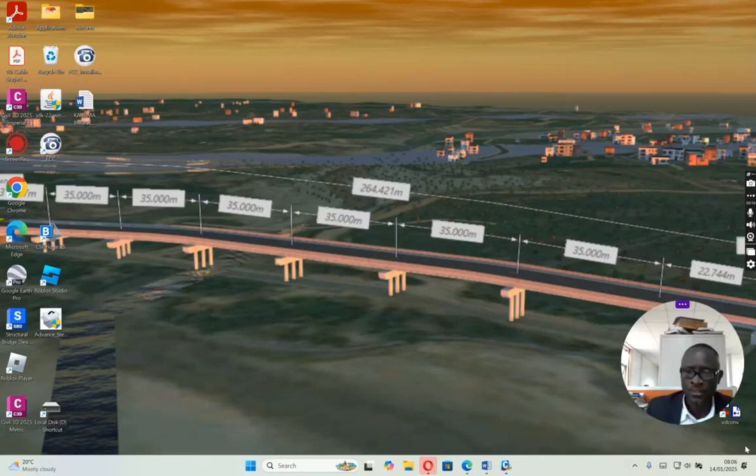Just to start our day, first an apology. I think a week ago I posted some knowledge sharing on post-tensioning box girder, but later on I saw comments that the sound wasn't there, so I removed it. Since then I've been trying to sort it out. Yesterday one of my young engineers helped and sorted out this thing. So I said let me replay this topic that I had shared with you and withdrawn. Let me share again because that is something that I thought I should share.

Okay, so this is, yes, design of prestressed concrete box girder using Midas Civil. Definitely we have talked a lot about Midas Civil. That's my choice. From 2018 when I learned Midas Civil, it has been a very good software. I feel comfortable using it, and I'm still learning more. I will get more time and also learn. It's a good software comparable to others. I know we have CSI, we have the LUSAS and the rest, but I found this a bit user-friendly.

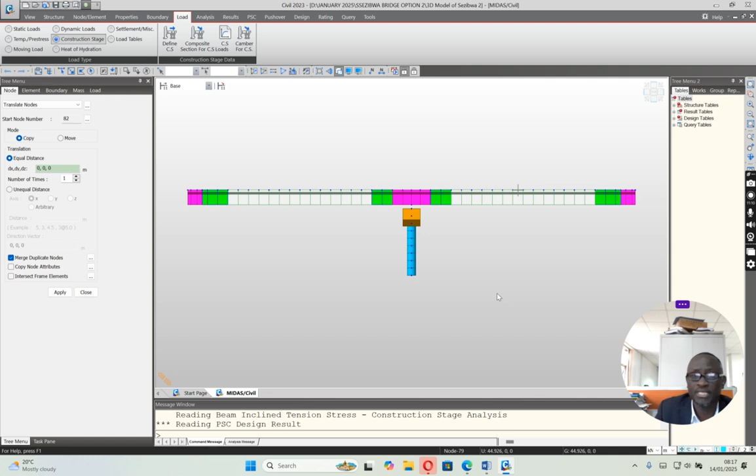So this is what you would call construction stage. For construction stage 1, this is your support system - you can see here representing the abutment, and this is the pier. Then construction stage 2, you see now what it is. Then the third stage - so all these stages must be modeled and catered for.

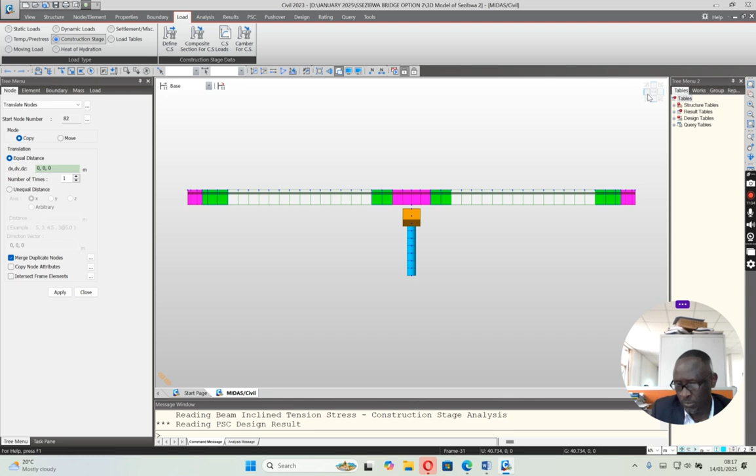Taken care of in your analysis and everything. So this is where I talk about construction staging.

So then we can go to analysis and design. This is where you do load applications, you do finite element analysis. Basically Midas uses that, where now for applying the application you do dead load, superimposed dead load - this is now both superimposed dead load and the dead load from self weight. Then live loads can include even traffic, pedestrian, quite a number.

Then pre-stressing forces, because for post-tensioning and pre-stressing systems, pre-stressing forces you must also apply when you do the cable. It has to be, because you have to pull it and then allow it to exert force onto the member to be in compression.

Then there are design checks you always have to do. Once you do your design, it's important to check compliance with codes and standards. The good thing with this software is that after doing the design, it will give you a comparison with the allowable limits. If it has exceeded, it will tell you this is beyond limit, so you have to adjust the design.

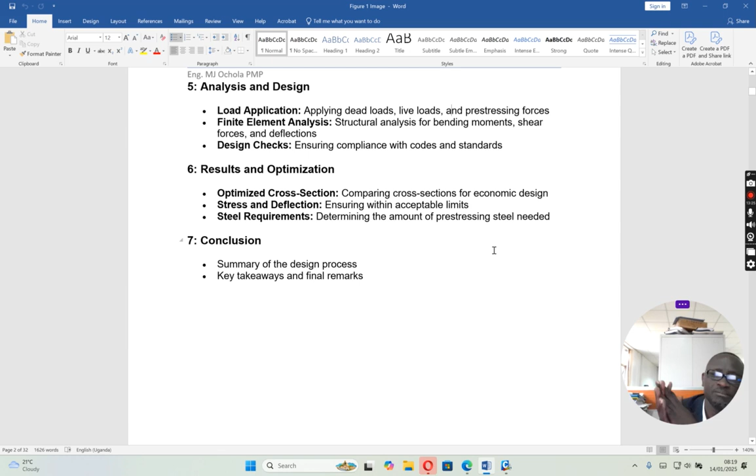Then results and optimization, comparing cross-sections for economic design. This is what we normally do within acceptable limits, determining the amount of pre-stressing steel needed. That's just a matter of now. Maybe you find you've done more than needed, about 80%, when even 75 or 60% could do the work. So you try to do an economy, resizing the members until you get what fits the purpose.

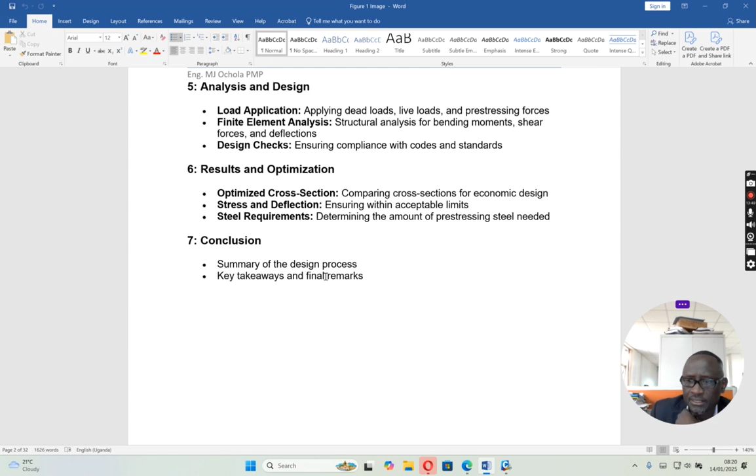But again, if you look at the redundancy I talked about, it might be tricky if a 250mm section can work, and I don't think it has any impact if I do a 275 or even a 300. The impact will be minimal, because the cover will be increased a bit, and the carbonation ingress can be delayed further, and the section becomes durable without impairing the integrity of the bridge.

So that is a brief narrative.

So the bigger question now is, what should a modeler be aware of? Say okay, I'm going to model this bridge, I want to use Midas, I want to model it. So what are the requirements? First, you need to know the structure you're going to model. You need to be well versed with the geometry. You need to know the different elements, dimensions, all that you need to know.

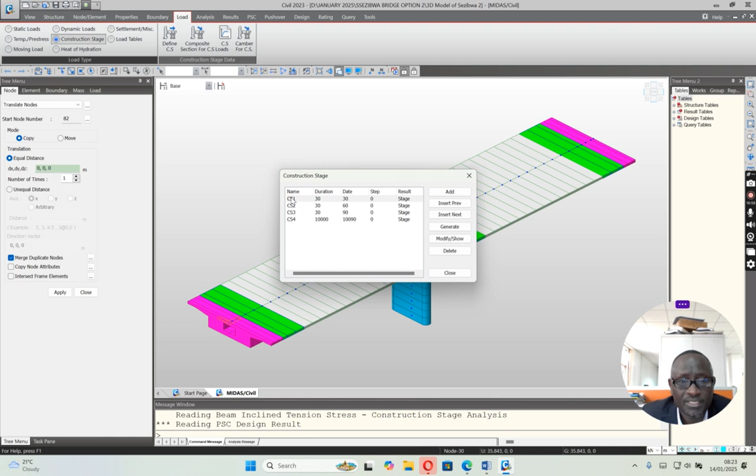You need to be aware of the structure and boundary groups, because these are the things that will help you group your structures to do the construction stage sequencing. Construction stage requirement is also important, so you always have to come here and have a look at what to do. You see the element, the boundary group, then the loading group. You need to be aware of all this, and they are all created here, and that will simulate exactly how you are going to construct this bridge.

Where do you start from? That's exactly where you do it, and you give it the adequate time, load it, put all these other requirements, put the boundary conditions, and proceed. So that is why it is very important.

The issue of transverse tendons - with this box girder, sometimes you realize that even after pre-stressing and tensioning in the length or direction of the bridge, transversely you may find that the overhang is too much, and when you check the local effect analysis and your design, you realize the cracks are still too much, sometimes even deflection. So sometimes you have to apply transverse tendons, and if you check most literature, they give some guidance on how to do that, but you can actually model it properly and check, ensuring there are no stresses induced beyond limit. That will be from first principle.

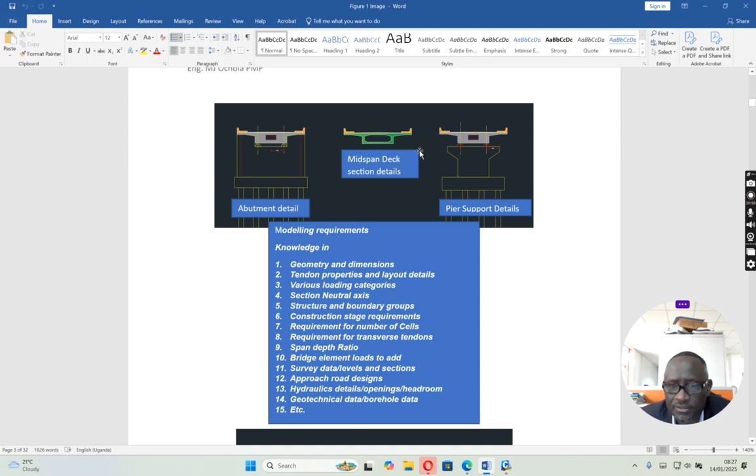Then the raised walkways, you need to determine the weight. Then the wearing surface, you need to know the weight. Then if there are services, all those different loading patterns need to be taken care of, and you group it under superimposed dead load. You could apply them differently, but when you get into grouping, you need to know where to place that.

The survey data, levels and sections - you need to know the levels, the terrain behavior, topography, so you're able to model your substructure system. The top of the deck should also depict exactly how the bridge sits, whether on grade or on slope, you have to design it that way. If it's curved and also on slope, you still have to model that. That knowledge is very important.

This now takes you to role play - who do you work with to make sure you have all the required information to help you do the modeling and the design?

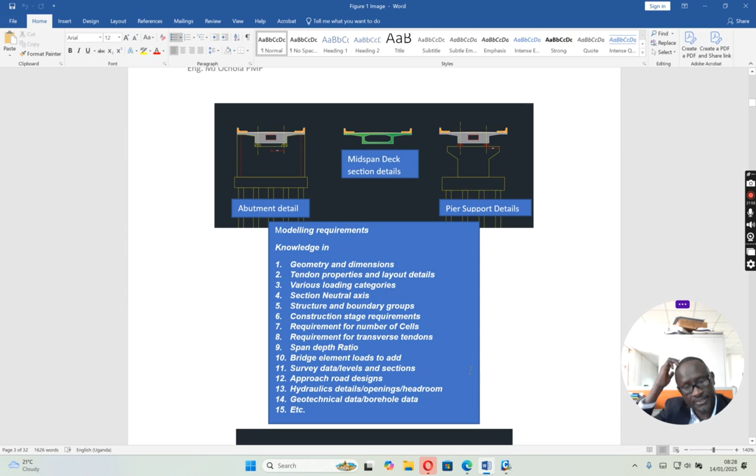Then the issue of approach road design - the highway person must come in. You get to know the profile, so you're also able to adequately model and design the fill, the retained fill behind the abutments.

The use of hydraulic details - the issue of openings, the headroom, the scour depth, all that information. You need to know all of this, which will guide your model.

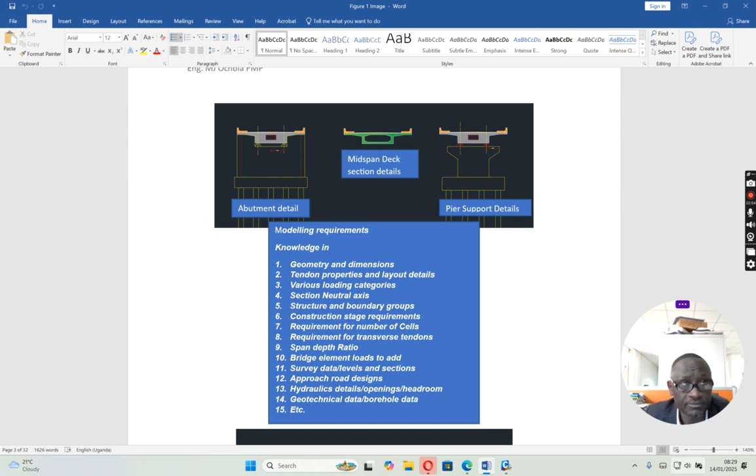The use of geotechnical data, the borehole data. If you're going to model soil structure interaction, these piles must be modeled. So what guides the modeling is actually the geotechnical data or borehole data - that is very, very important. Without that, you will just start guessing. So these are some of the things you need to be aware of.

Normally a good modeler is one who understands the geometry, who can easily draft. Drafting - sometimes we say it's for the technician, but even a designer, the engineer needs to know it, because that is where you understand the different elements of the structure, and when modeling you know how to stack them to get the real thing you want to model and analyze.

So you have a span of 30. Now I think this moved - this span has to be in line here. Even this has to move. This should be slightly here. If you adjust this, I see now why it moved a bit. So here, if you move like this, okay - adjusting this member affects this span dimension.

So basically this span is given. The hydrology guys always give you the internal dimension, but for you now, based on this center line, it's now up to the engineer.

Tendon layout profile is guided by knowledge of the slope at the anchor block, manuals and code requirements. You can now see these are the different profiles you need to be aware of. You even need to sketch and see the different curve areas, the minimum radius you're going to use. At this point, you need to know the slope at the anchor block - using rule of thumb, it is 6 to 12 degrees.

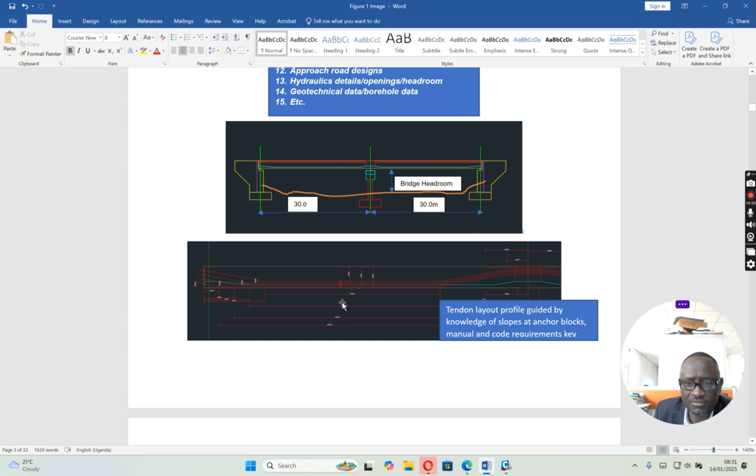So this is something that you need to be aware of. It helps a lot. So without having some knowledge, because now even the different types of layout, you have the parabolic, you have the drape type. This seems to be like a drape type, but in the model you see it's a bit curved. You combine the drape and so it's a hybrid type kind of modeling. Okay,

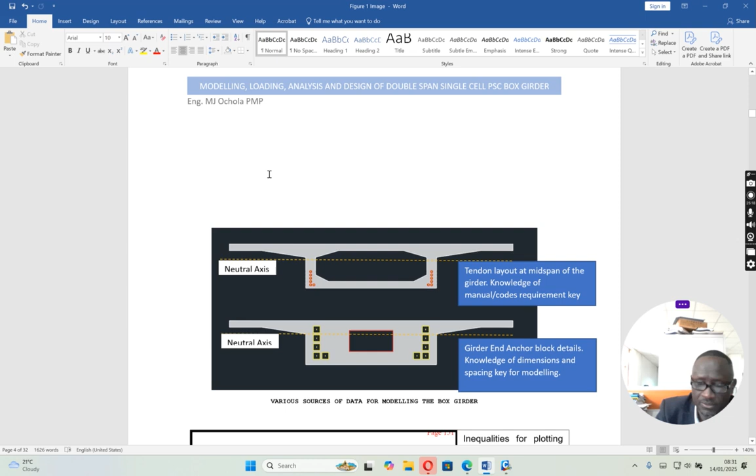so this is a typical section. You can see this is a mid span and this is over support. You can see the neutral axis, but this is the mid span. This is one way of defining your layout. Another one could be down here. So it depends. Next time I will share the one which does it down here, at the bottom flange. So this is running along the webs.

So you see these are depending on the number and the area of cables here. You can do quite a number if you want. Here is only one column: 1, 2, 3, 4, and this 5. You can actually do two columns per web if you want, depending on the loads and the span. Okay, so basically various sources of data for modeling the box girder.

This is the girder end anchor block detail. This is very important actually for post tensioning or pre-stressed concrete. If your anchorage or anchor block details are not well done, if there are defects, definitely that girder will not work very well, because all the tensioning and holding of the tension is done at the end section of the girders.

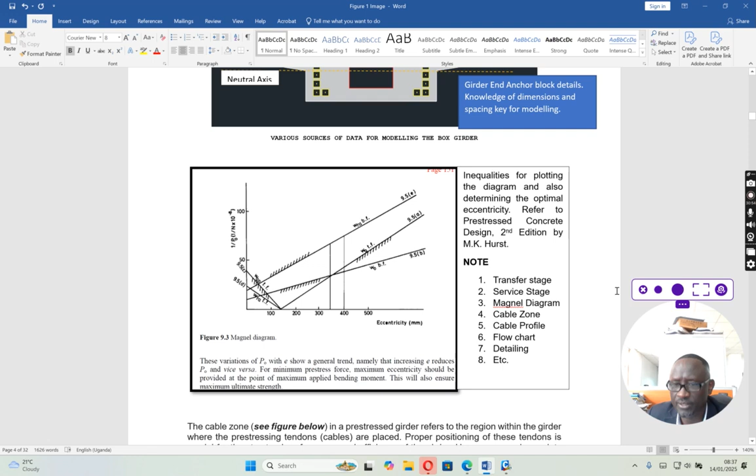The cable zone, cable profile, flow chart, and detailing. All these are very, very key for you to follow when you are dealing with pre-stressed concrete girder. And here it is, the cable zone. See figure below. In a pre-stressed girder, it refers to the region within the girder where the pre-stressing tendons are placed. Proper positioning of these tendons is crucial for the structural performance and efficiency of the girder. Here are some of the key points you need to look at.

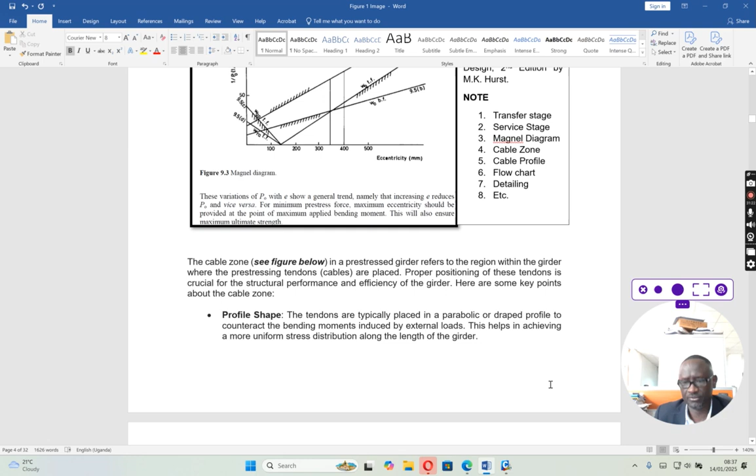So this is the cable zone that you need. So this is your neutral axis. So all these cables you find actually all lie below the neutral axis. Anything beyond will generate excessive stress to the members. You have the bottom and then you have the top. Here you can now play with your cable profiles to ensure that when you tension and you are checking the stresses, you don't have stress limits exceeded. It will create a lot of cracks, and cracks are not required in pre-stressed concrete. So that is something that I thought I should pick out.

And then this is now the cable profile. Cable profile is important. I've seen even on site. The engineer must be able to provide the coordinates for plotting the cables to simulate what was designed. Otherwise, if there's no compliance with design, then it will not perform the way it was designed. The eccentricity will be different, the stress generation will be different, and you'll be lucky if the stresses generated are within limits. If not, then the project fails.

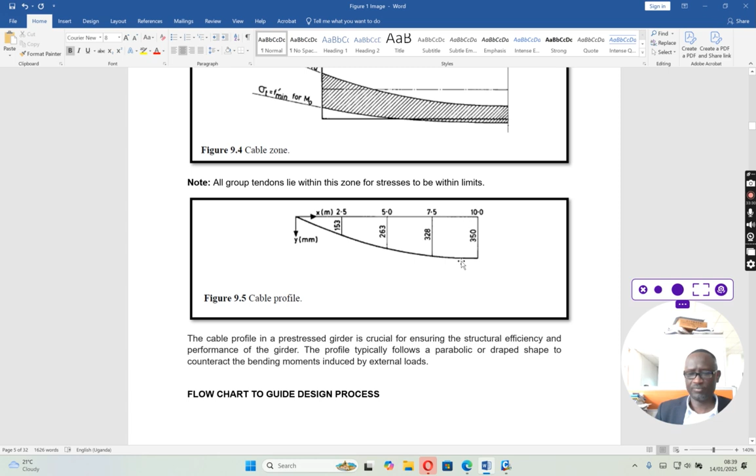So these coordinates are very important, that they are plotted verbatim, so that what was designed or modeled is exactly implemented. The cable profile in a pre-stressed girder is crucial for ensuring the structural efficiency and performance of the girder. The profile typically follows a parabolic or draped shape to counteract the bending moments induced by external loads. So if you don't do the coordinates well, what do you expect? It will not work. You'll get into trouble.

Then I think there's a flowchart. Yeah, this flowchart is normally for all the design we do. Actually, we are supposed to generate flowcharts. Then using the flowcharts, you are able to look at it. You give it to the junior engineer, someone fresh from campus. They can actually follow it. If there are issues, they can get back to you, and then you guide. I've seen in most literature, almost all actually, you find at least there's a flowchart that they use to guide.

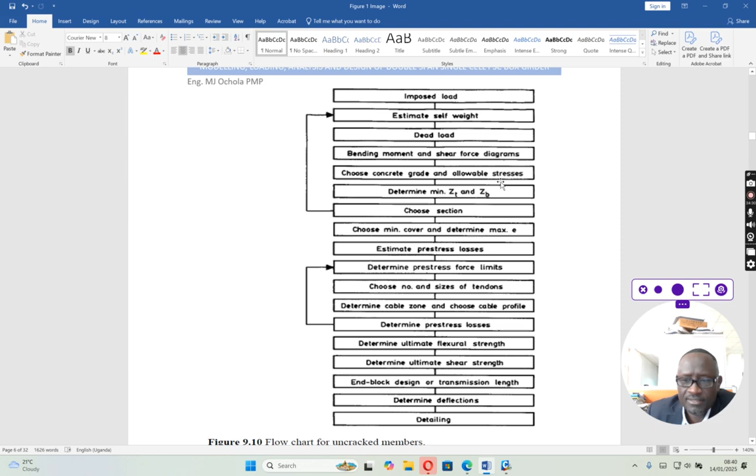You can see here they talk about imposed loads, estimate the self-weight, dead loads are here, bending moment and shear force diagram, choose concrete grade and allowable stresses. All these are guided. You get them from the manuals, and then you do your iterative design and make sure all the limits are complied with. Okay, this is for uncracked members, so you can also have for cracked members. So this I've already talked about.

Magnel diagram is a graphical tool used in the design of pre-stressed concrete beams. It helps determine the optimal pre-stressing force P and eccentricity e that ensure the internal stresses within the beam remain within permissible limits at both the transfer and service stages. Transfer, this is the construction stage, and then service is when you are done with construction and the bridge is open to traffic. So these are the geometric requirements needed to be known. Internal forces, that is estimate the internal forces, induced self-weight and moments due to dead load and live load, permissible stresses. This is something we've already discussed.

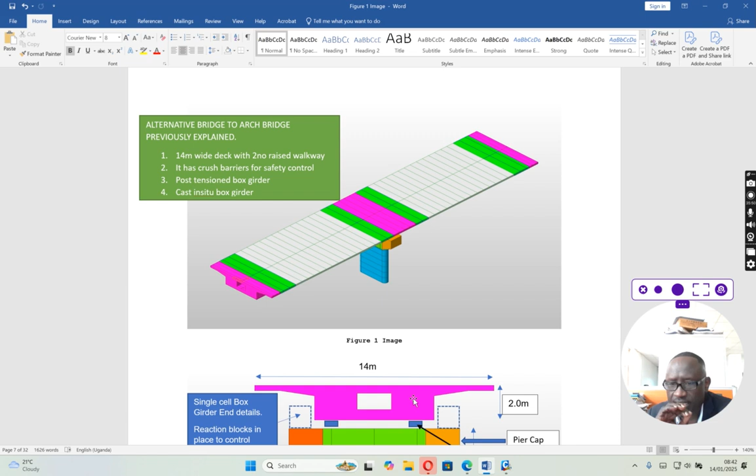Now this is the model. Of course, this box girder, if you look at it, I shared a similar bridge, but that was an arch bridge, which was also 30 meters. So what I did here, just replace the arch with the box girder. So now the next thing would be comparing materials, comparing technology, comparing the time required to construct, so that you can now say, okay, this is cheaper, or this one is expensive, in terms of material quantities, in terms of time to implement, and even the technology required.

So basically it's very important for you to say this is more expensive than the other only when you have done some comparative analysis. So this is a 14-meter wide deck with 2 raised walkways. It has crash barriers for safety control, post-tension box girder, cast in situ box girder. So even the construction approach is similar to that of an arch spandrel bridge, an arch open spandrel bridge.

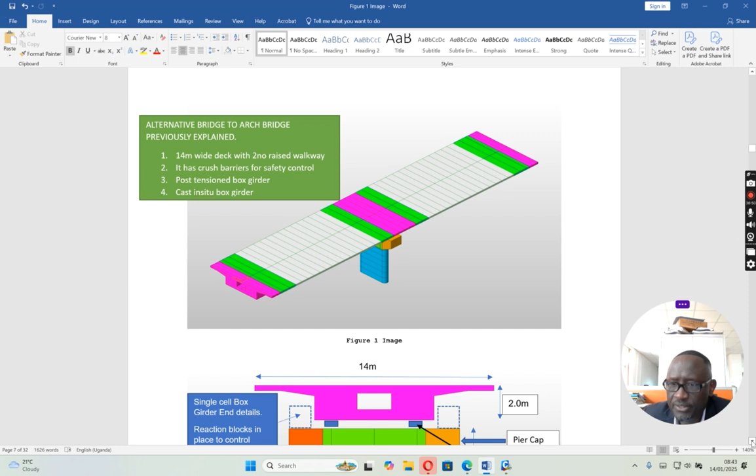So this is the detail of a pier support. These are the reaction blocks to control lateral movement in the event of earthquake tremors, or even when you have floods exceeding the headroom designed by the hydrologist. So the structure should be stable laterally. That is where the use of reaction blocks comes in handy here.

These are the details. This is a pier cap. Then this is the bridge bearing. We normally don't provide the design, but you have to design for it. Normally the manufacturer gives this design. All you need to get is the reactions, deformation, movement. Those are some of the information you need to share with the manufacturer. Then they will give you the bearings that are suitable for this bridge type, the bridge span and the weight. This is pier support.

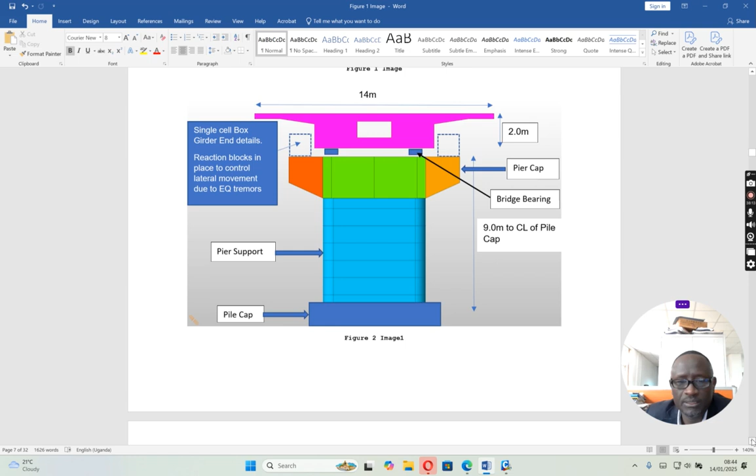Construction stage 1 is when you build the substructure system. Actually, I told you you can do the pile system first up to pile cap. That will be your stage 1. Then stage 2 becomes the substructure system, which is now the abutment stem and the pier stem. But for modeling and just to demonstrate, we normally combine both the pile system and the abutment or the pier support as one.

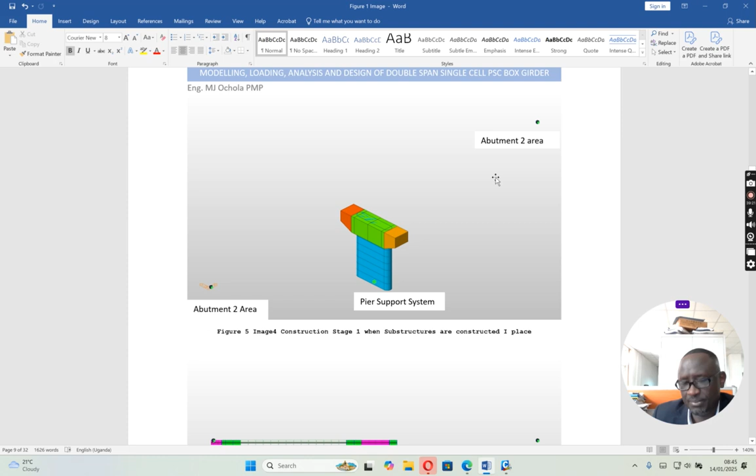So if you want to understand the stress generation right up from pile cap, you can actually do the different construction staging, so that you see the load build up in different sequencing. So pier support is here. Your pier, then abutments are represented with this.

Then under construction stage 2, you have now prepared your prop system. You stabilize the foundation here to avoid deformation during construction, because wet concrete is very heavy, including construction loads, equipment and human beings, so you have to be careful. So this is the first stage you do.

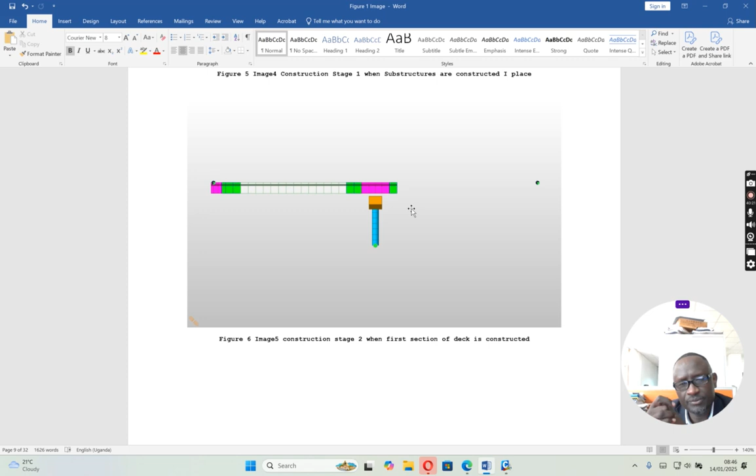Normally for a continuous member, you don't stop midway. It has to pass the support up to the point of contraflexure, where you have zero moment due to dead load. That is a good area where you can terminate, or else you have a construction joint. You do it after that point, then the next stage you start from that point and complete the span. So this is stage 1.

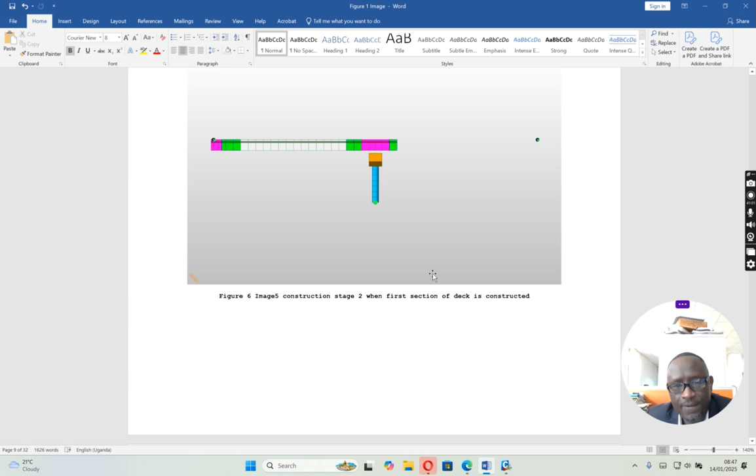Then stage 2, now you have put all the prop system in place. You have stabilized the bottom of the props to avoid any differential settlement. For pile systems, I think the settlement is limited to about 10 to 12. You need to check Tomlinson and other foundation design and construction textbooks, which should give you the limit requirements. So that is construction stage 2.

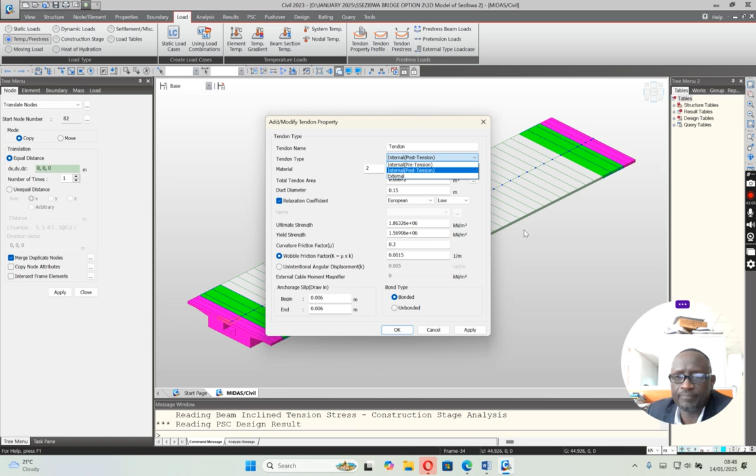There are different types here: internal pretension, internal post-tension, and then external. Very interesting terminologies here. This one here. Then we also have

tendon profile. This is now very interesting. This is where you have to plot. You see this one here. When you click on it, it's already appearing there. That's the next one. That is another one. So how do they do it? You come in here.

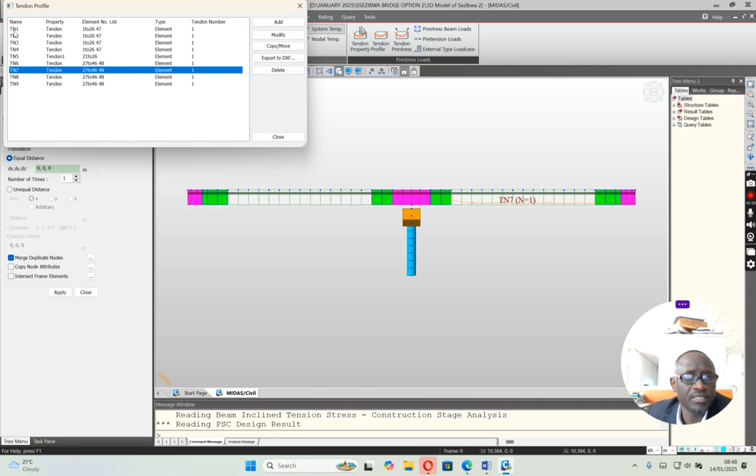Then you just look at the different ones. You see here you have the tendon name, you have the tendon property, you have the tendon group. You need to really know which group this one lies in. Then you come down here. This is where you have the coordinates; they are very important. I told you, without knowing the coordinates and understanding the geometry of the structure, it becomes difficult to model. So it's very important you get to know some of these things.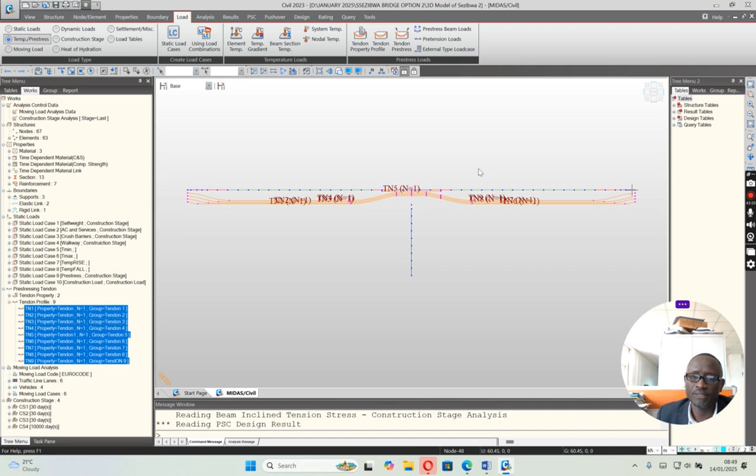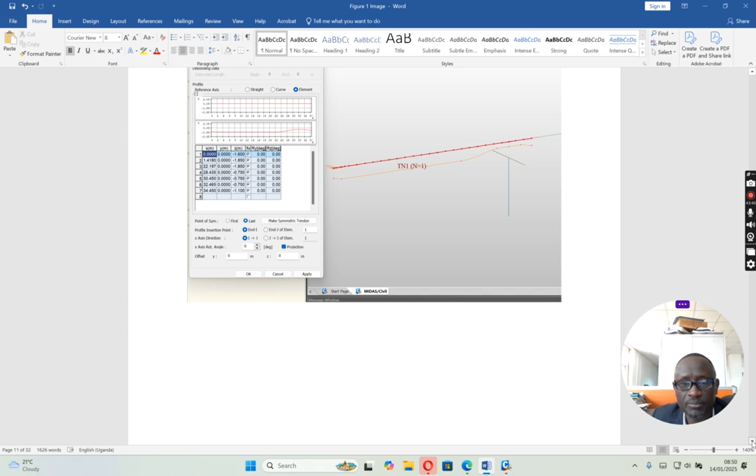There we go. So if you want to view actually all that you have plotted, you just come in here and then you display. That's what you can view. All these have been plotted. So that is how you can actually do your stuff. Okay, so this is a demonstration of how you can put the property. I've already demonstrated how you do the plotting, so it should not be a problem. So all these are the modeling process or procedure.

Now when you have done plotting, you also need to do the pre-stress forcing. You have to define the force, that is the tendon pre-stress. So we have to come under this command detail. This is the last part here. This is for self weight, but these are already given here. If they were not here, you would go to pre-stress and put the pre-stress system here. If I click one of them, then under the load group name, you already defined your pre-stress load group. You put it here, and then they all come. Under this tendon, you highlight all these, then transfer here.

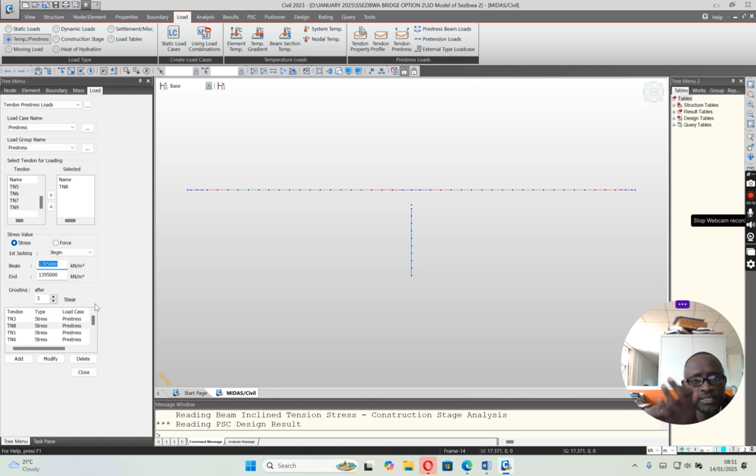Then they appear. Make sure you specify the stress values given. This is 0.75 times, not the jacking force, the ultimate tensile strength, 1860. Sometimes it is 1860, sometimes it is less, 1770, depending on the cable details and the loading. This 1860 seems to be for long span bridges and bridges subjected to high, extreme loading. But if it is for buildings, I think you can use the lower value. So basically that is what you have here, and then you transfer your load and you're able to see everything.

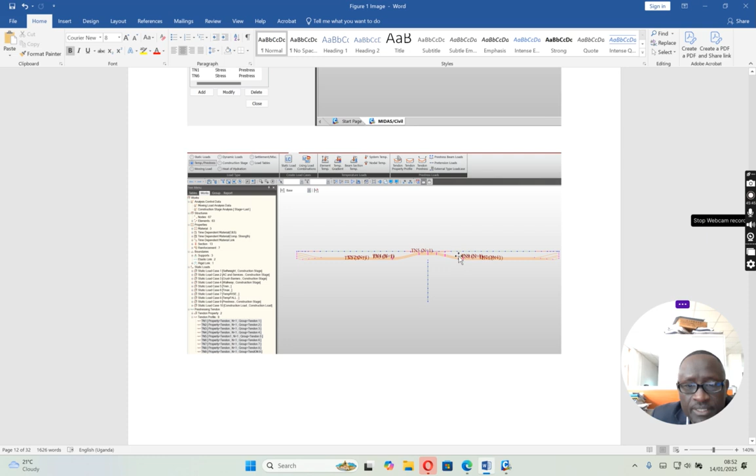Then you can come down here. I've already demonstrated that if you want to view all that you plotted, you can highlight it from here and then display. If you want to hide it, you click and do undisplay. So that is briefly it. These are the different loads. This is, I think, wearing surface and services. Being a line, it's designed as a line load, so you just take the width times the load per square meter. You should be able to get that as a linear meter load. So that is for the wearing surface.

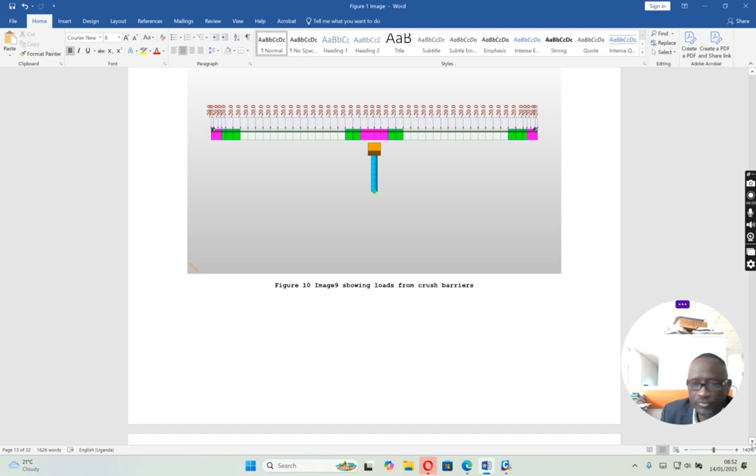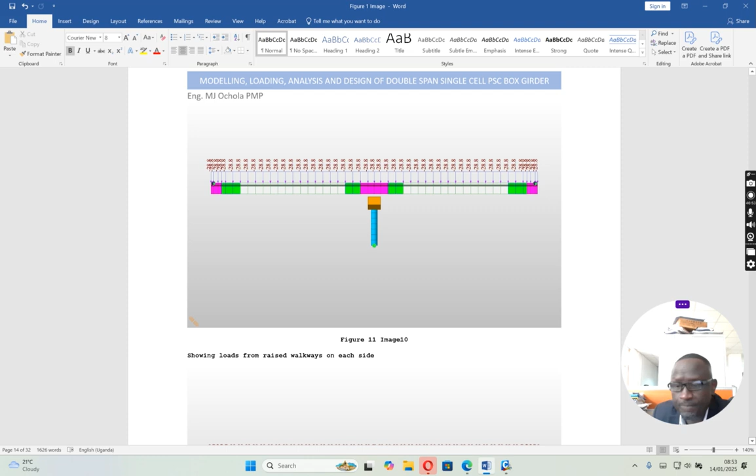This is for crash barrier. There are two crash barriers on both sides. Each could be about 10, so having two and applying it on a line beam should be 20. And then I think this is raised walkways, about 0.3 meter thickness and 24, that is unit weight. That's about 7.2. Multiplied by 4, you get 28.8, to apply it on a line beam. So that is how this loading works.

Then the temperature you can do. There are code requirements for the temperature you can apply, especially for the temperature gradient. But for the element, you just highlight. I think this box is affected by temperature, so that is exactly what you can apply. This is now the temperature gradient, but here I can still also demonstrate something.

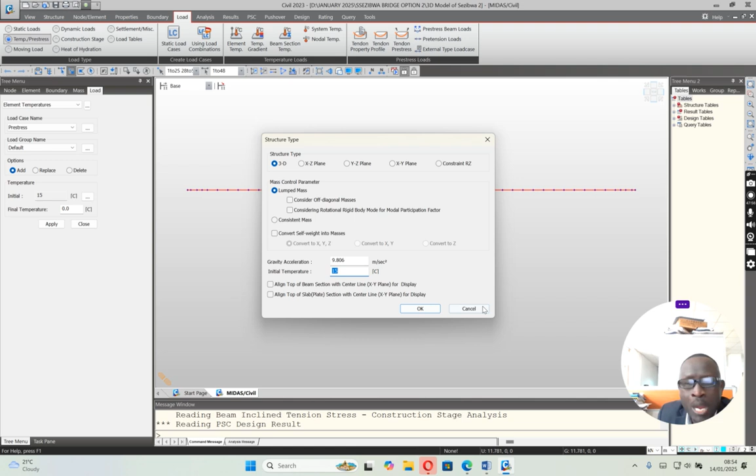When you come to the different temperature now, this is temperature element. You can go to initial, this is where you specify your initial temperature. Then you're able to apply maximum, but you need to highlight it first. Then if I want maximum temperature, just highlight here. Then you put minimum, which takes you up. This one brings you here, and then you specify. Then temperature gradient.

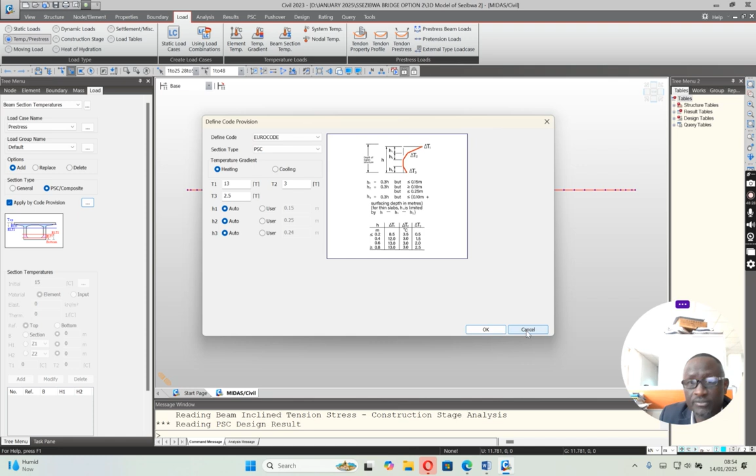This is where now you have to go. You go to the Eurocode system down here. Eurocode is here, PSC system. You have the temperature heating and the temperature cooling. So if you've done the issue to do with the temperature effect on bridges, you should be able to get all this literature, right. They are there in your notes. So you read. So these are just normal stuff.

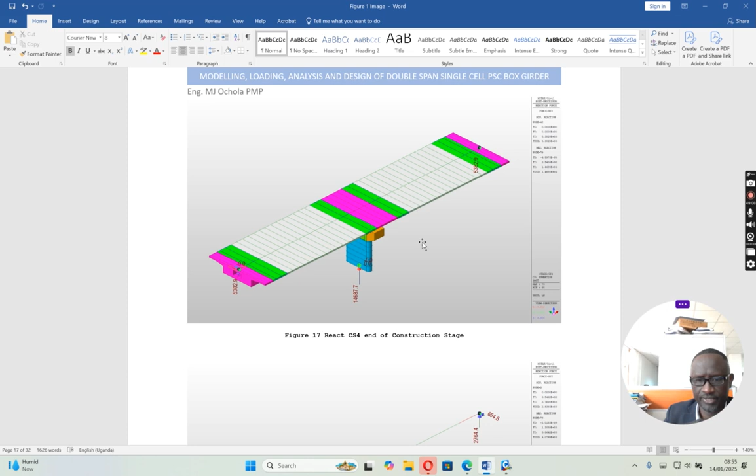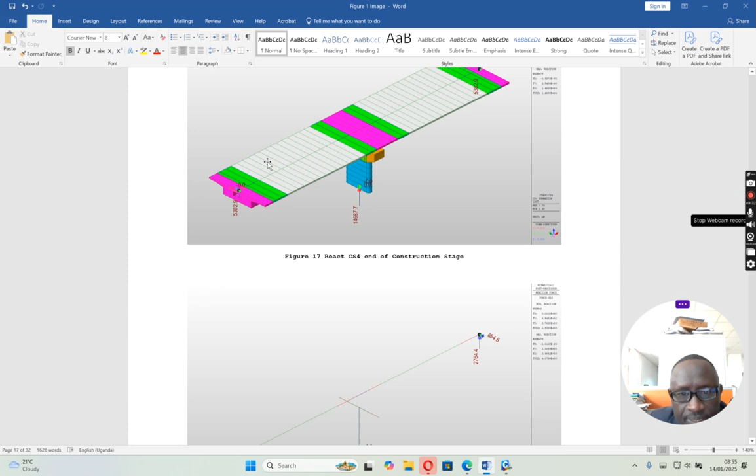Then this is traffic load. The reaction seems to be like so. You can see that the dead load, the dead weight, is higher than the live load at the pier support. You see here is 14,000 dead load, and then we have live load at about 15 and 5, about 30%. So these are the different reaction values you can experience. This is for load combination. You can see load combination now is high. It's up to 37,000, almost twice the dead load.

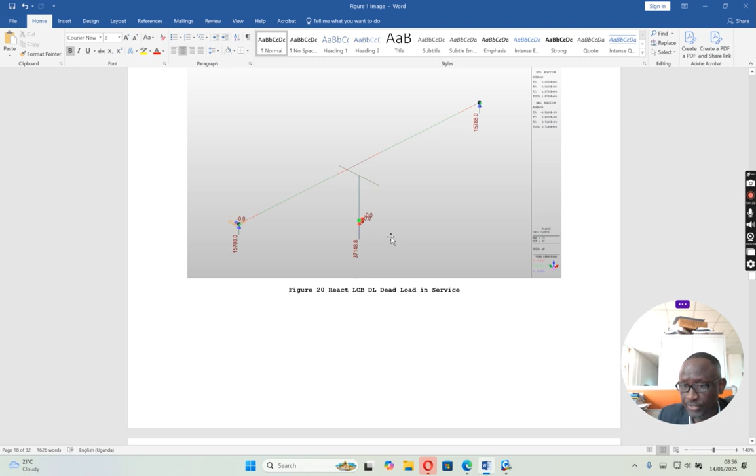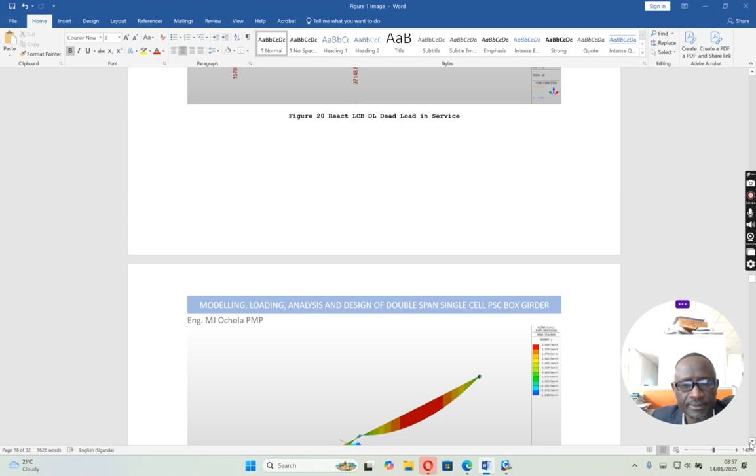Okay, so let me see. This is another load. Now this is the reaction dead load in service. The first one is when you have just completed construction, it means it is the dead load due to self weight, while this one is dead load combining superimposed dead load and the dead load due to self weight. Those are the two differences. You have to mark that. And these seem to be self weight. You can see the difference in the response.

This is pre-stress moment. It's the reverse of the number. So that is what you need to do. You need to read. This is the axial load. You can see the axial load on the deck tends to be higher here because both sides are stressing and affecting the section over the pier support.

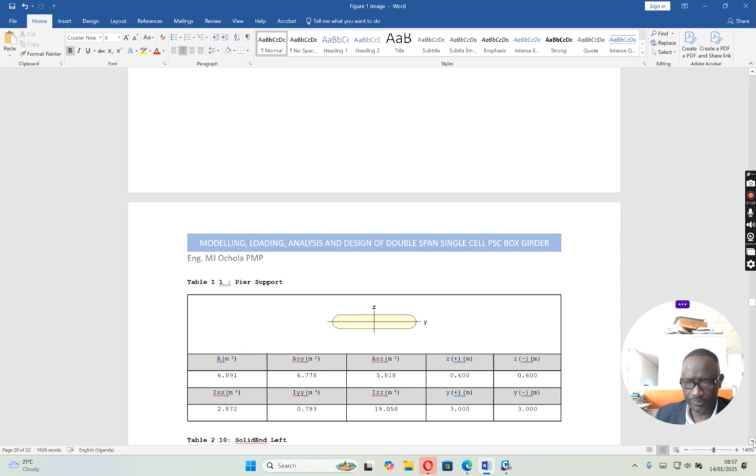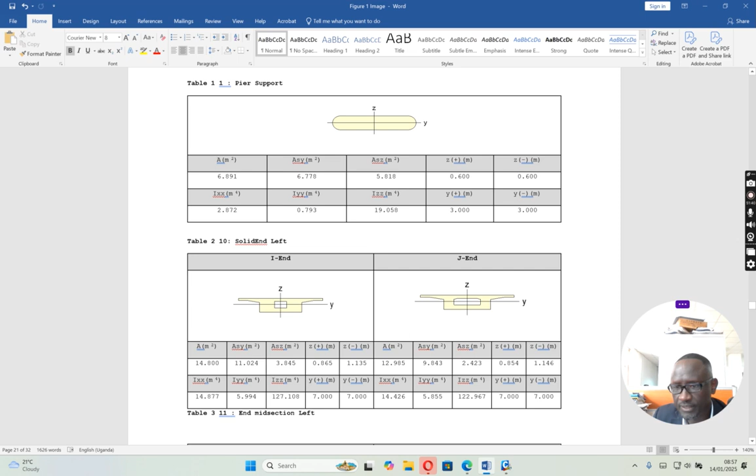These are the different sections that you can generate from the software. This is the pier section, to give you all the properties. This is our support, this is halfway towards the mid span, and this is the mid span. So these are the section properties that you can easily generate using Midas. Don't need to waste much time. If you want, you can do it. It's already from the modeling, you can actually get it. If you model very well, that's what appears.

Now there's this anchor block thing. I told you, you are going to pull your tendons, and then you hold it tight. It tends to shrink or to regain the original status. In so doing, it is compressing, because the end block is holding it properly. It tends to put this member into compression. That's why most of these pre-stress systems keep the concrete section purely in compression.

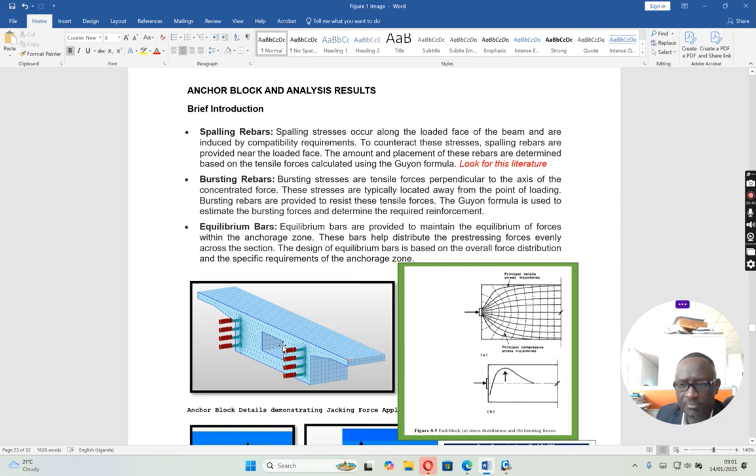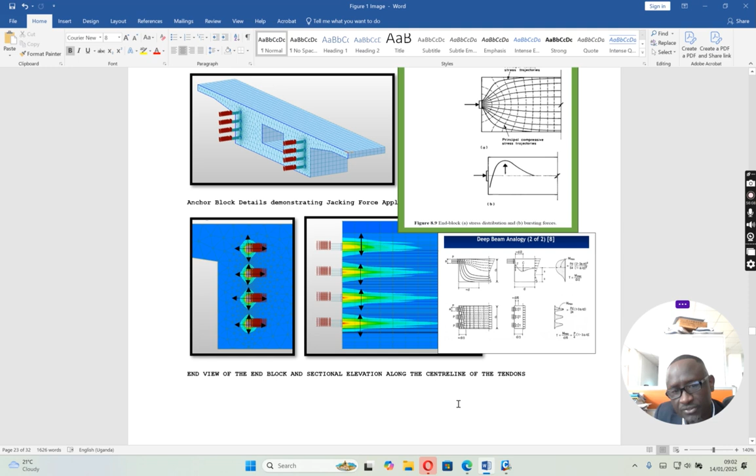Below is a model which was done. You can see this is the face from the extreme end, looking inside into the bridge direction. You can see the stresses are going both laterally and up. This is a section cut here, and then you're viewing it. You can see the stresses reduce away along the length of the bridge.

This is the deep beam analogy. So these are three, here we have four, here you can see three. This is the moment they are talking about, and this is the stress generated.

So you can actually model using solid elements, not plates, using solid, and then you're able to see the stress generated. You can also use these solid stresses to calculate the amount of reinforcement you need.

But it's good to relate to earlier work done by different professors. You are going to see different formulas used by different authors, which people are using in the field. When you come across one or two, you can also try to use and compare.

So this is just a model using Midas, but this is from already established literature by different scholars. This one is from M.K. Hurst, I've already given you this one. This is from Guyon, there's a literature - I think there was a presentation, a workshop he attended and made a presentation on. I think there's a big book which I picked this from. If I get it, I can share that.

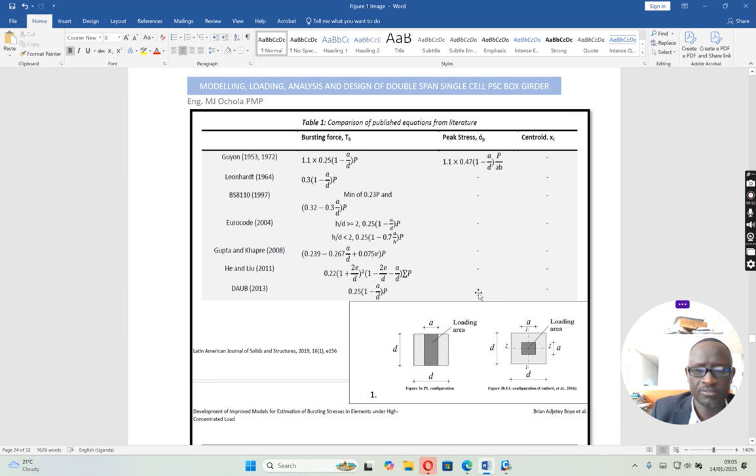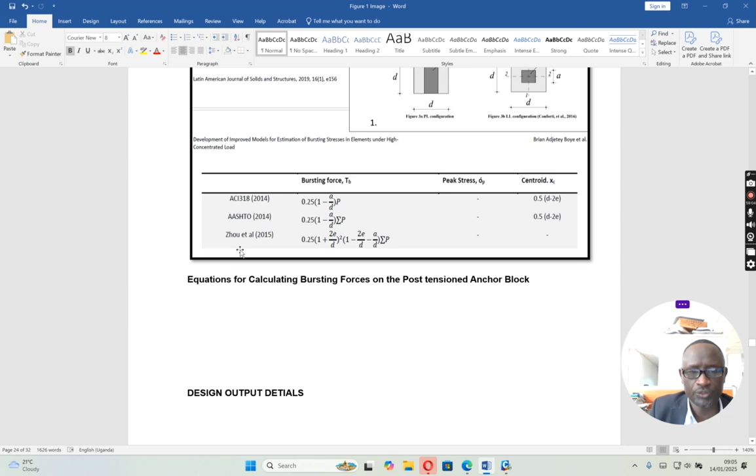But there are other existing texts that you can also read from. The BS 8110 1997 has something here. Eurocode 2004 has it here. There are similarities actually - Gupta and Khapre, He and Liu all have it. Then even ACI 2014, AASHTO 2014, Zhou et al, all these are here.

Now, having done all this design, you can also have design output. How do you appreciate design output from Midas? Not to waste much of your time and confuse you.

When you have done all this modeling here - boundary, load, analysis, results - now you come to PSC. Under PSC, you have parameters. Look at these parameters and fill them correctly. After you have done your analysis, you have the results, and from the results you are able to see the different load combinations, already here.

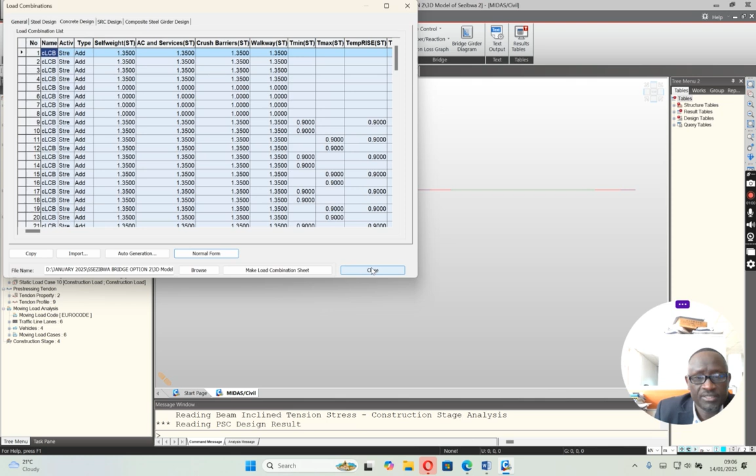You can even look at your spreadsheet stuff form. You can make load combination sheets, everything. But now you want to design to see whether the sections are okay or not okay. That's where we go, you come in here, PSC.

If you are dealing with reinforced concrete, you come to design and reinforced concrete. If you are dealing with steel composite, you come to steel composite. But for us, we are dealing with PSC, pre-stress concrete.

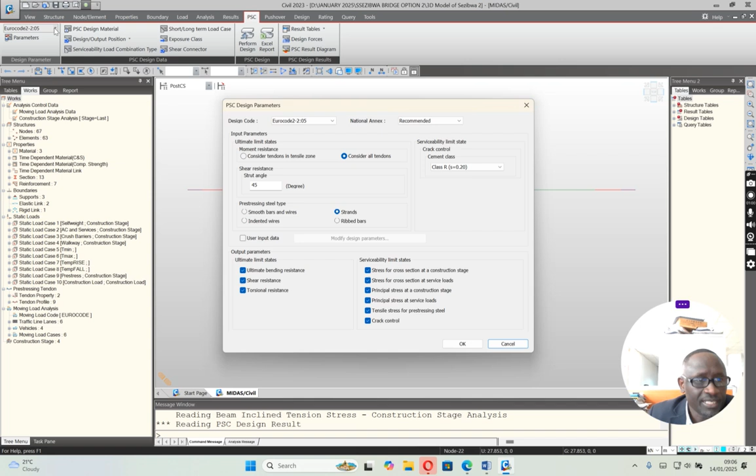So the parameter is very important, and the design code - are you designing using a certain parameter? Just make sure it is either BS, Eurocode, IRC, and the rest of it. So do that, then you come to design material. Make sure these materials comply - grade is defined, rebar type defined.

All that, then you come to serviceability. Normally, if you put load combinations manually, then you would come and put this thing manually. But if not, you come and there's quasi, there is frequent, there is characteristics here, because we did automatic load generation, load combination generation - that's how it also picks it and brings it to.

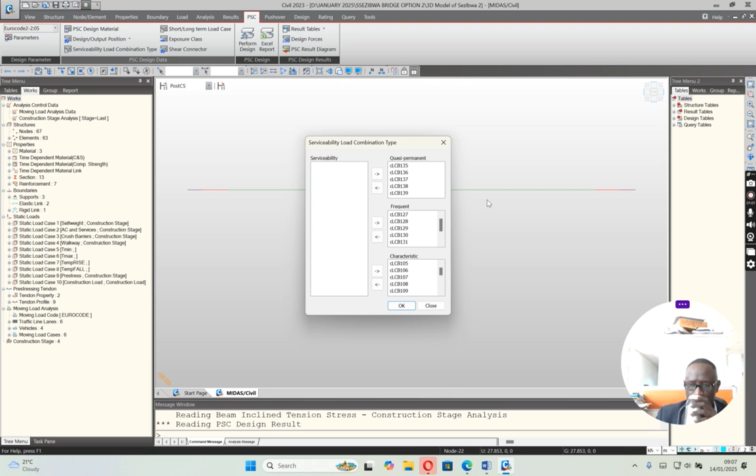Then we do this one by software exposure class. In the exposure class, this is where the knowledge of your geotechnical or material testing is very important, because you want to know whether water is contaminated, the chemical content is high, acidity is high, whereby you need to improve on the cover. Is it severe, very severe, or what? You need to understand that. Your code has all these conditions defined, like XC1, X0. You go to that literature to understand which one applies, so you're able to specify, maybe it is XD1 for the top or bottom.

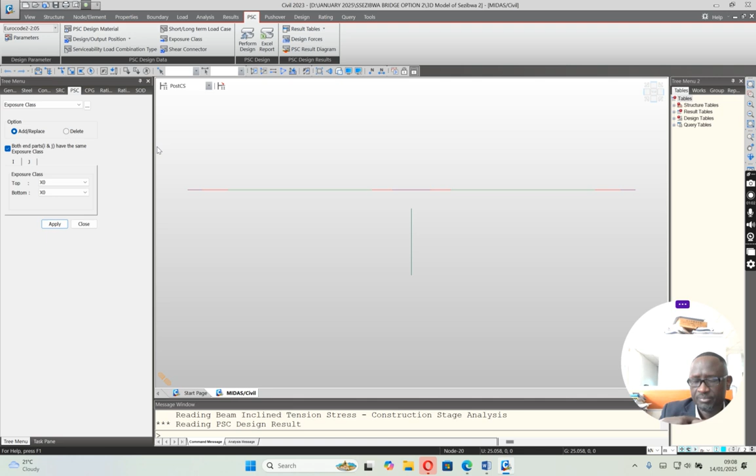Then from the exposure class, you do shear connector. If it is cast in situ, you don't need to talk about shear connector. But if it is precast, precast panels, each of the panels have the shear connectors. The way they do the concrete joints, so for them to joint, to connect well, and when joining the two and putting the bonding stuff, it works well. So you are able to specify here.

Then you come here. This is now after you have done all these requirements, you perform the PSC design. After you have performed it, you can view the different design checks. Check for flexure, this is check for flexure strength, check for shear strength, check for combined stress for cross-sectional construction stage. Then it also checks whether the stresses of tendons have not been exceeded.

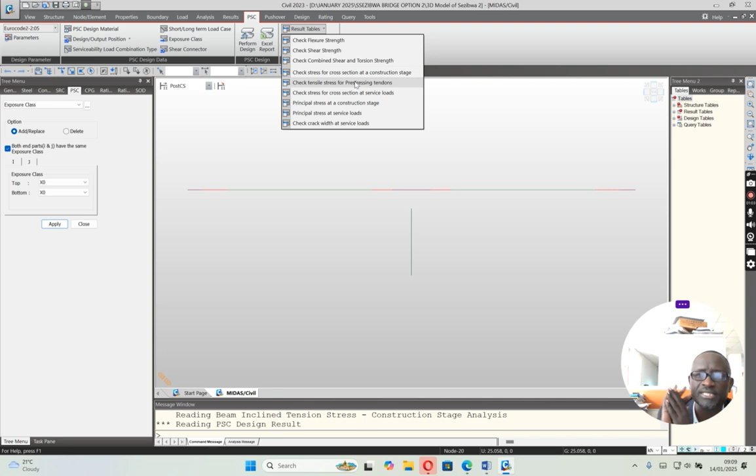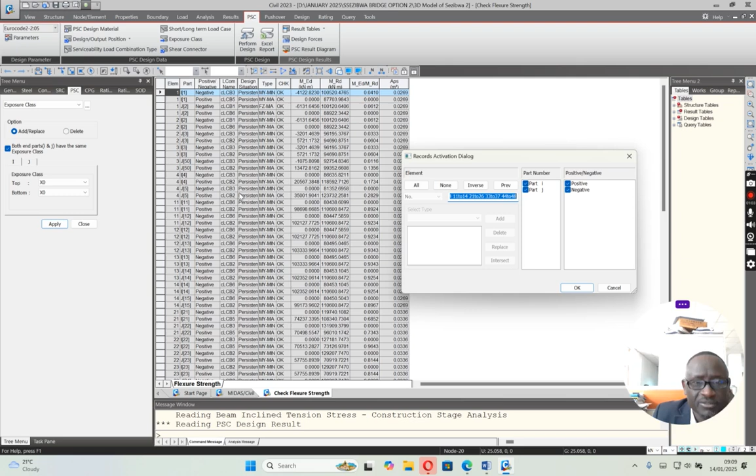I told you, you have to do this at construction stage, which is transfer stage and service stage, all the way down. So I can click here and you can see all these are passing. Your ultimate checks, both positive and negative, for all these load combinations have been checked and they're all fine, meaning the reinforcement you put in your section is okay. For shear also you can check. Shear has some failure in some areas, so that will help you improve on your shear rebars or section. You refine your section, revise it. That is something you need to do all through.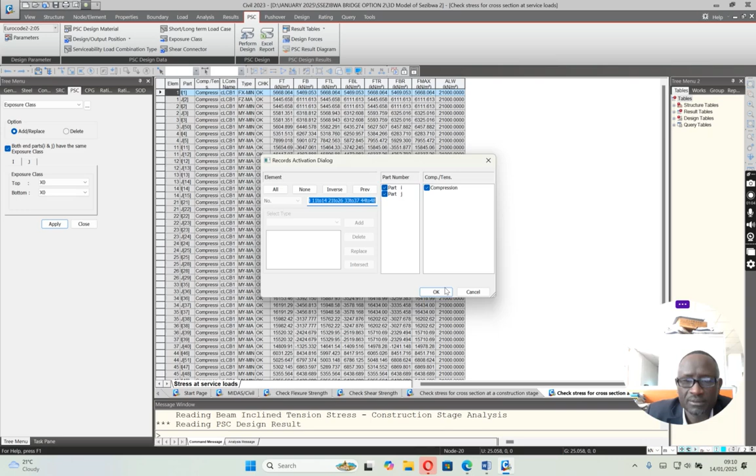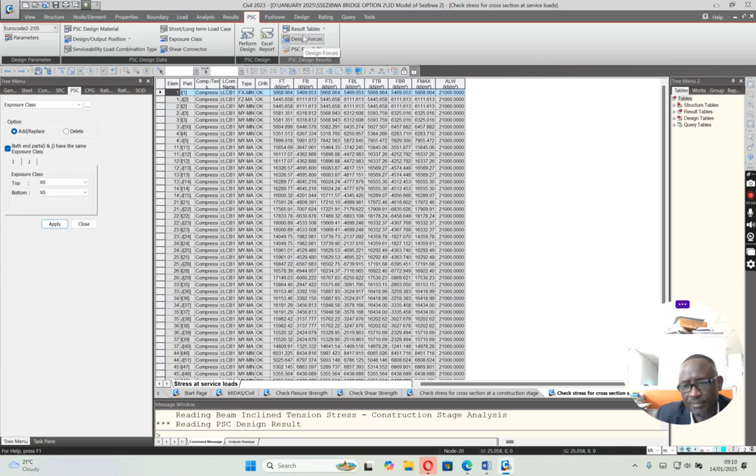If I look at the pre-stressing at construction stage, most of it passes except in a few areas, so that also requires you to modify. What about in service? In service it seems to be passing. That would mean you need to determine what is causing this failure at construction stage. You need to look at the amount of strand or the stresses defined at the beginning, the concrete section, or the construction loading could be more. You have to check all that.

From there you can also look at the different design forces. Last time I told you the moment generated when a section is pre-stressed is different from the moment generated when the section is reinforced concrete. You will find it is basically different, about 30 to 40%. So these are some of the things to consider.

These are the axial forces. You see this axial force is very high, that's why it can crush the member. You need to be very, very mindful of this. You have to be aware of it, it's very dangerous. So you can generate this and look at the worst case. You can also use it for designing your member if you want, but the design is already done.

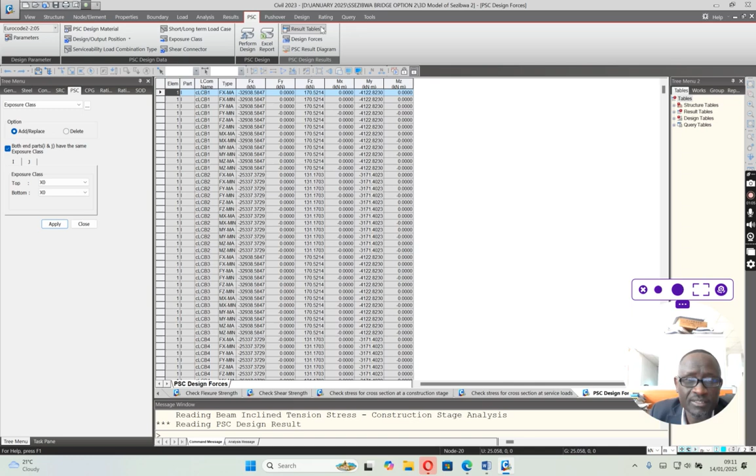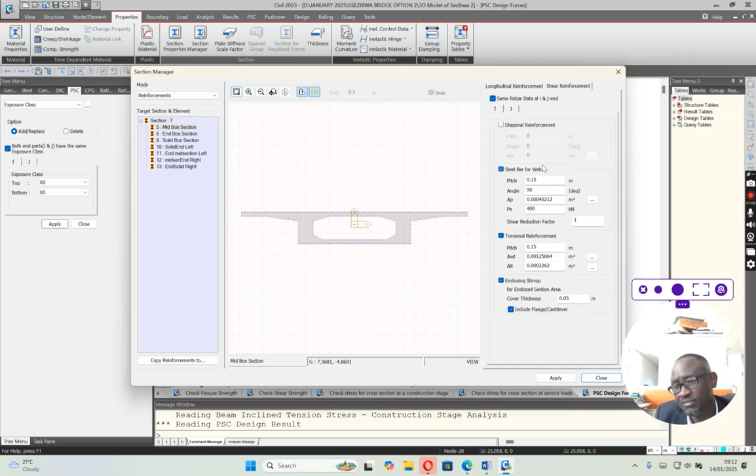You have seen from here that first I need to show you something. Section manager is where you define your reinforcement detail. You may wonder where it's getting this from. The flexure and shear checks are based on this reinforcement, the longitudinal and shear reinforcements. These reinforcements are what bring about the passing of the requirements. If you adjust this reinforcement and make it less, definitely something else will happen. So these are things you have to make sure you do to get what is required.

So basically, ladies and gentlemen, this is briefly about box girder continuous. Next time we shall look at maybe a simply supported one with a different configuration of the tendons.

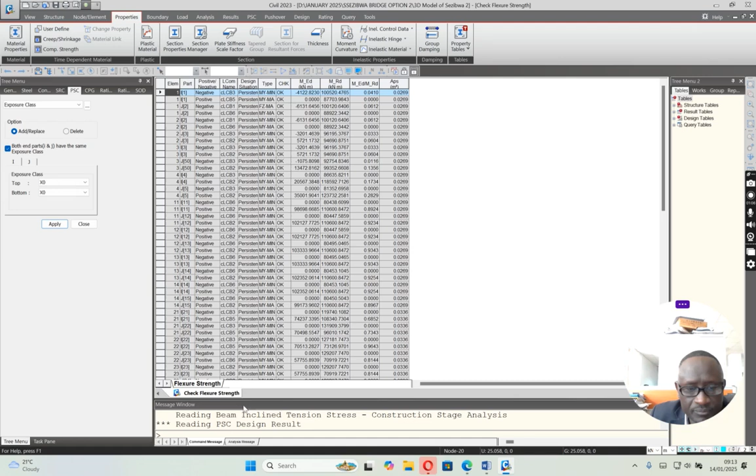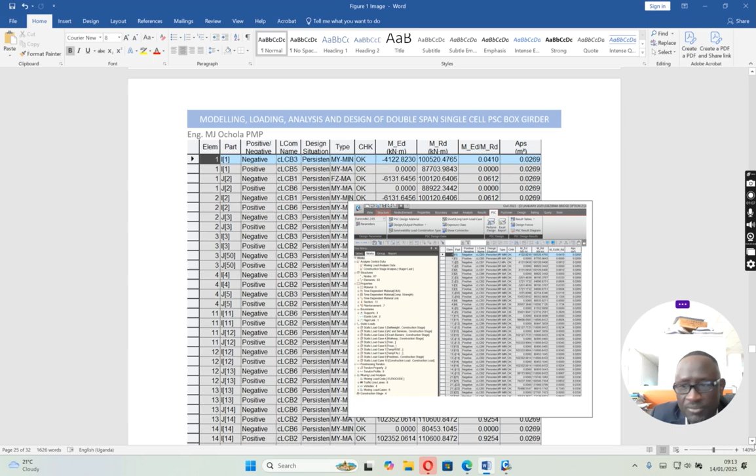Just for appreciation, no, this is knowledge sharing. This is not lecturing. If it were lecturing, then you'd have to do a bit of in-depth research and do it in a more professional way. But this is knowledge sharing, so appreciation of use of Midas.

I think Midas has become dominant, and actually for us here in Uganda now, and I think in other parts of the African continent, we are using Midas a lot, and it seems to be gaining ground because of its graphical user interface and also the ease with which you can learn it. Most students learn this thing very well. They have a lot of modules on YouTube that many people follow.

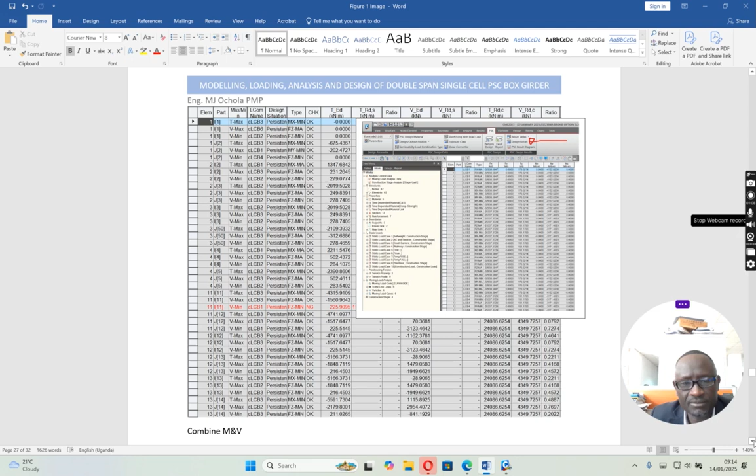So I think based on that, it's a good management tool, because you can actually be a manager and you can also carry out your own spot checks without affecting performance of your subordinate. You can actually do an independent check within an hour and be able to manage a project very well.

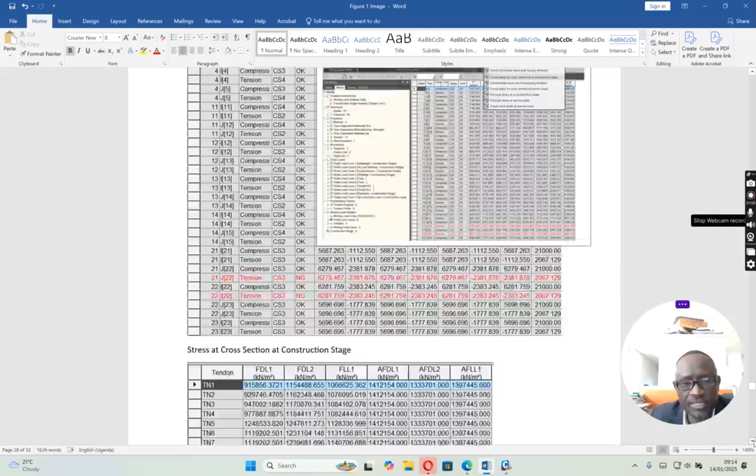So these are the different design outputs. The red you see here basically requires you to cross-check your sections and the other details and make sure they all pass. I think for pre-stressing tendon, they're all within limits, so that means the stresses generated have not been exceeded.

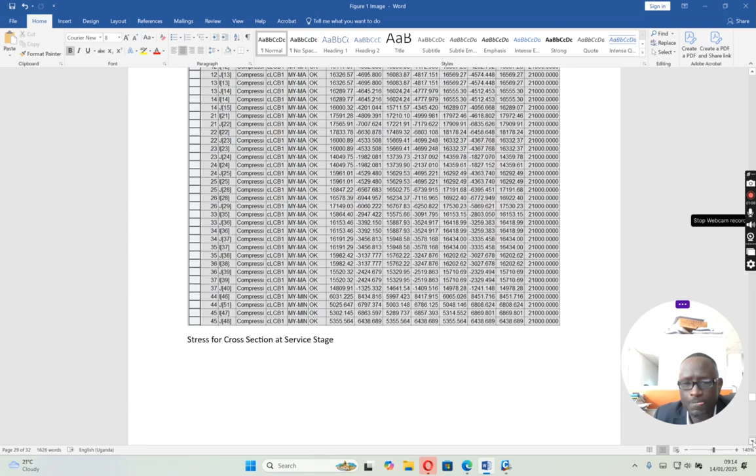You saw this, this is stress for cross section at service stage. This is moment, shear and axial force of a pre-stressed member.

Finally, I have some references here which I said I should share. One is from New South Wales, Sydney, Australia, on design of pre-stressed concrete bridges, by R.I. Gilbert and this gentleman. This is a very good literature. If you read this thing, you're going to enjoy your bridge design.

You have structural design documentation, concrete box girder by Schlaich and Scheef. We have also design of pre-stressed concrete structures by Dr. Amlan Sengupta and Professor Devdas Menon.

Introduction to basic concepts, early attempts of pre-stressing, brief history of pre-stressing, comparing with reinforced concrete, the invention of Portland cement, and the use of steel bars between 1824 and 1940.

You know what happened in 1940 when the Tacoma Bridge came down. Of course, the engineering was still evolving. That one, I think I will not even comment on, but that's what I remember when we talk about 1940 in the bridge industry.

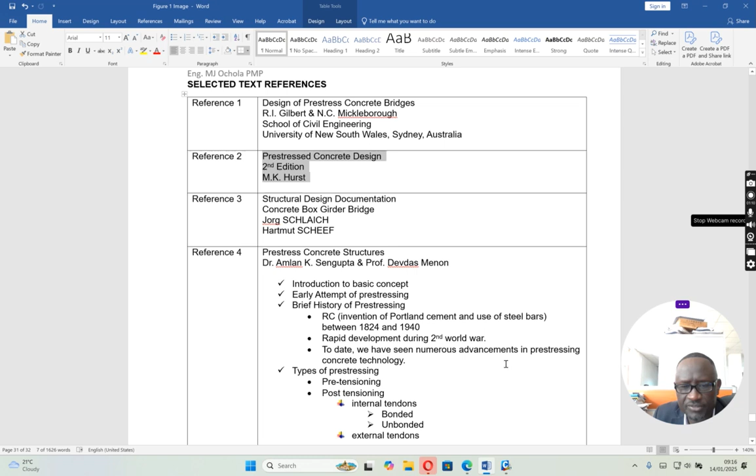Type of pre-stressing, part of what you're going to learn: there's pre-tensioning and then there's post-tensioning. Under post-tensioning, you have internal tendons. Under internal tendons, you have bonded or unbonded, while external tendons, basically this is well self-explanatory. Definitely, along the way as we engage ourselves, I will hint on and get some literature on pre-tension and post-tension.

The good thing is, in Uganda here, we've also done both now. When you're moving along Kampala Northern Bypass, the bridges, the overpasses that you drive through there, those are pre-tension girders. And with pre-tension, you prepare the yard, you put the mold in place, you tension the cables, and then you cast concrete when the cables have already been tensioned.

So when concrete has gained adequate strength defined by the engineer, then you release these cables. So as these cables try to regain their original status or form, they compress this concrete. So this concrete becomes stronger in compression because it's already been enhanced by the use of cables, pre-tension. So that is pre-tension: you tension the member before casting concrete, then you release when concrete is already in place.

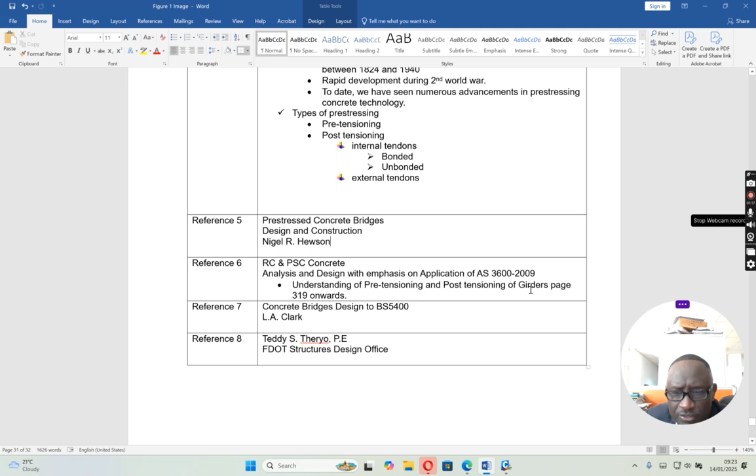So this literature, please read, and there is more on the internet. There is RC and PSC concrete bridges, that is AS 3600, I think published in 2009. Understanding of pre-tensioning and post-tensioning of girders, page 319 onwards. I was specific because it's a big book, over 600 pages. So once you get this book, just go straight to this page, you'll understand well.

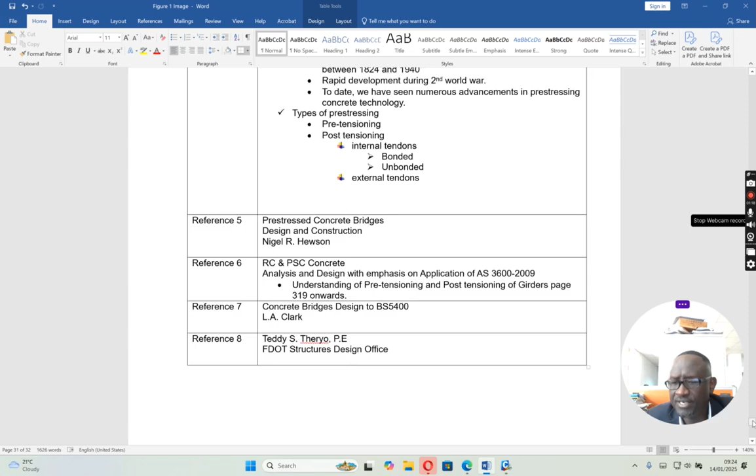There is a book, design to BS 5400, written by L.A. Clark. Please look at that one. It has very good examples and talks very well about pre-stressing systems. Then Teddy S. Theryo, PE, FDOT. This will be USA, Structures Design Office. They have very, very good literature for you to read.

So this is where I can end my knowledge sharing, but definitely we shall continue.